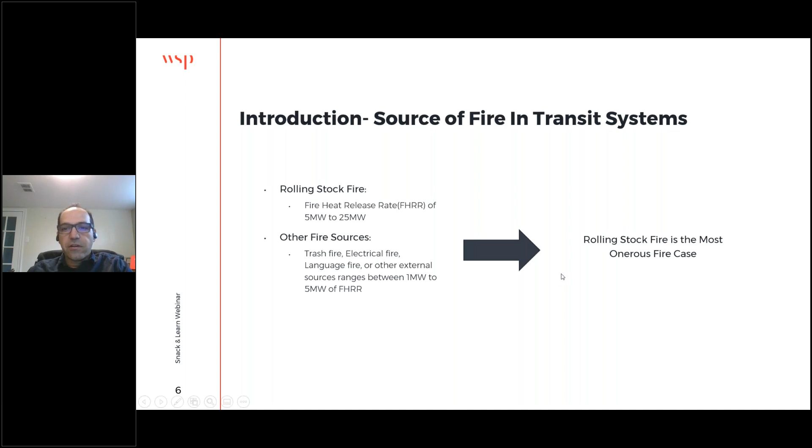So what are the sources of the fire in a transit system? There are a few major sources, but we can categorize them in 2 different categories. One is the rolling stock or the vehicle itself. Based on experience from different projects, if the rolling stock in a transit system goes through a full fire, the fire will be between 5 to 25 megawatts. Other sources of fire could be trash fire, electrical fire, luggage fire from what the passengers are bringing with themselves, or any other external sources. They normally range between 1 to 5 megawatts. So based on these numbers, you can see that the rolling stock is the major fire that can happen in an underground transit system.

So what are we doing in this presentation today? For the first part about the fire, we actually gathered existing information from two reliable sources, UK Railway Safety and Standards Board and Federal Transit Administration, FTA. They both publish the data. You will see the data that we collected are from 2007 and 2015.

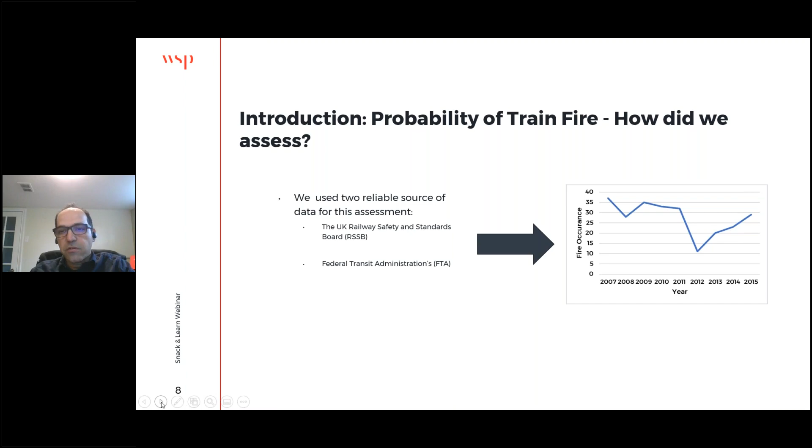The time that we were actually going through this analysis, I was preparing something to be presented for 2019 or 20. So the data is from that time. We had pandemics and everything. So because of that reason, the data is a little bit old. I looked at the newer data. I haven't updated it. It hasn't changed much, but definitely in the next version, I will provide updated data as well. But really the concept doesn't change. The concept still remains the same.

So to assess the risk, we are using CENELEC. There are different standards that you can use. There are even local standards. Some owners or companies have their own risk analysis, but we are using the concept of CENELEC. CENELEC basically tells us find the category and the frequency, and then we can find what are the risks of that incident. And this is exactly what we are going to do today.

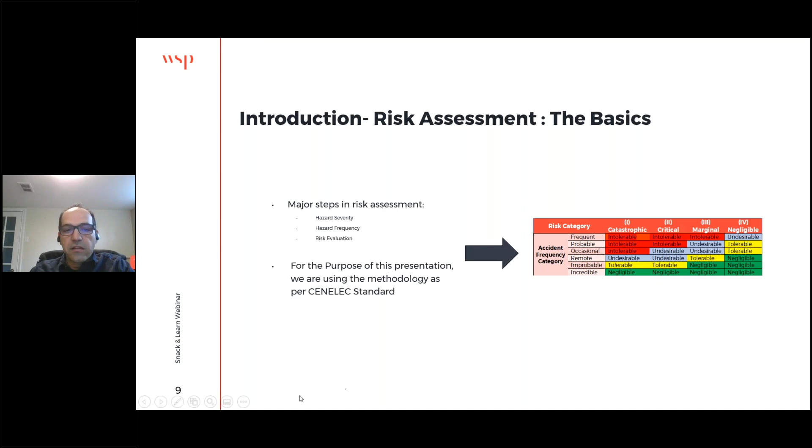So FTA data. We analyzed the data from 2007 and 2015. Based on the data from FTA, we actually went through all the data and we found the ones that caused a fatality. The final number is one major fire incident every 27.8 million miles traveled by the vehicle, or 44.7 million kilometers, if you're more familiar with kilometers instead of miles, like I am actually. I have a better sense of kilometers than miles. So is it good? Is it bad? Is it too much? We will see in a short period of time.

The second data that we use, RSSB, from British data. Again, major incidents with fires. Of course, there are incidents with fires and there are major incidents with fire, which is only 3.2% of all of those fires that are considered major. So based on that, and believe me, it was just by accident, I did not do anything with the numbers and data, but the number came back exactly the same as FTA data. It's still surprising to myself, but that's the reality. So the number came back 27.8 million miles traveled. You will expect one major fire incident every 44.7 million kilometers.

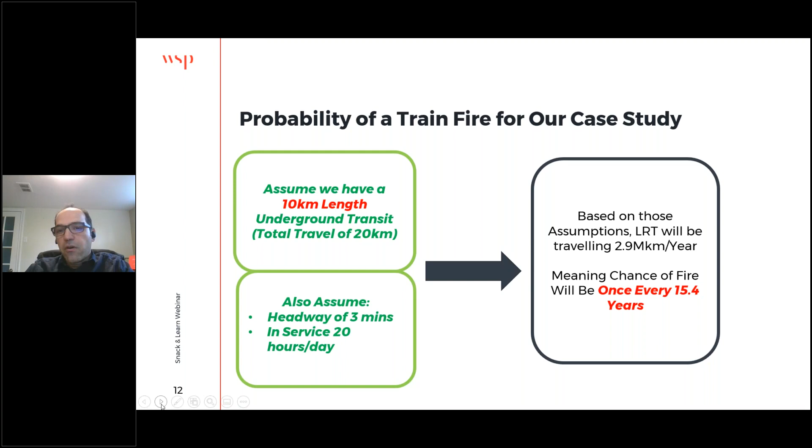It doesn't mean that it will happen. It's just a matter of it may happen. It's a very important thing actually to know that it doesn't mean that it is happening, but it may happen. So what do we do with that number? Is it a big number, is it bad? I guess to me, it makes sense because in my experience, at least 20 years being here, I heard of a few incidents. Some of them were major, meaning we had to evacuate the whole system. Some of them were not, but to me, the number kind of makes sense. It's in the ballpark of what I expected to see.

So for risk analysis, what do we do? We go to the CENELEC table. CENELEC actually is good because it very categorically tells you the frequency.

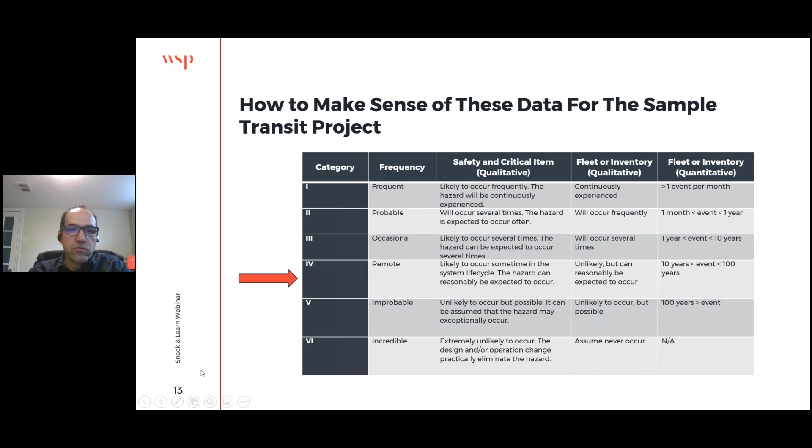If you're designing a 100 kilometer system underground, which I don't think that anybody does, then your category goes to occasional. So you have to go by project, but for most of the projects that I've worked on, we go back to remote.

As far as the hazard severity, a major fire incident could be considered catastrophic or critical. Either will work. It depends again on the situation, on your background data. You can actually talk with the operators, the fire department or authority having jurisdiction in that area to make sure that you categorize this properly, catastrophic or critical. I'm not really putting my foot on either of them. Each one could be correct depending on the project and the situation.

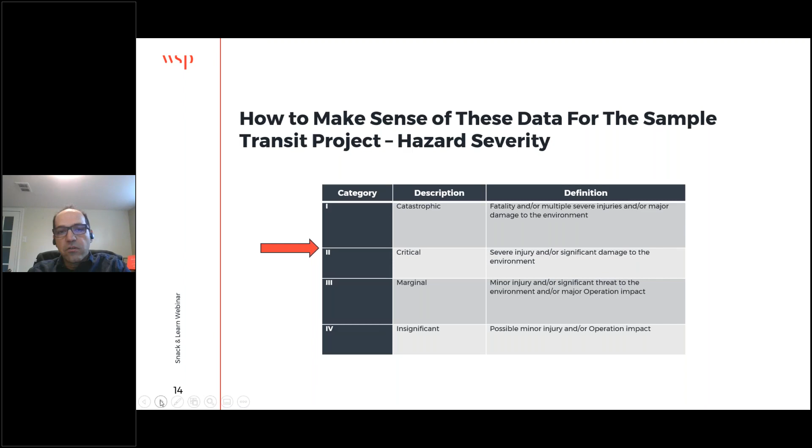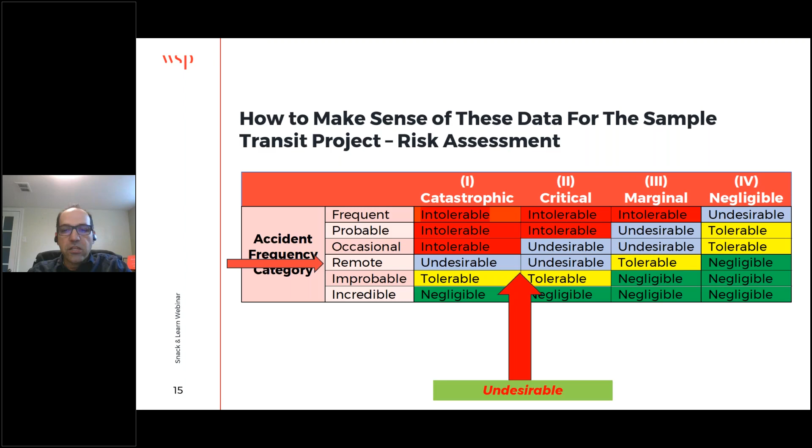The reason I'm not really insisting to choose one over the other is this. When you go to the risk analysis table with remote, critical or catastrophic, the risk comes back the same, undesirable. So when the event is a remote event, it doesn't really matter if it's critical or catastrophic. They are all the same category, undesirable. When a system comes back as undesirable, we have to make sure we mitigate the risk.

How do we mitigate the risk? In most cases, we go with codes. We go with NFPA 130, for instance, in North America. Building codes, there are European standards. Different regions have their own. Some of the owners and operators have their own codes and standards. We use that. In the next few slides, I want to show you a few features that, for instance, NFPA gives you to implement and how they work. Are they really changing the situation or not?

One of the biggest things that NFPA added in 2000 was fire hardening material of the vehicle. Pretty much what NFPA is telling us is that all the material used in a vehicle needs to be fire hardened. So there needs to be resistance to fire and fire propagation. It gives us a really good result at the end of the day.

The South Korean fire that I talked to you about and showed you some photos of at the beginning, they did a simulation of their existing car catching fire and a car that has been fire hardened based on NFPA 130. The results were pretty much the difference between day and night.

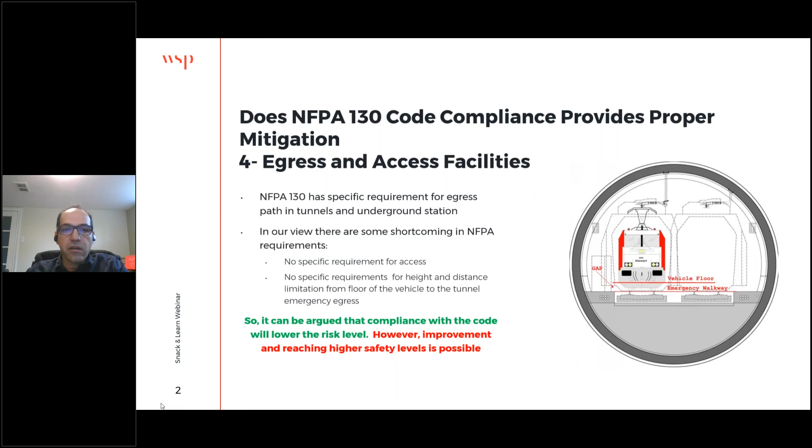There are other aspects of NFPA as well that we can talk about. Because of the time, I cannot really go through the details, but I encourage every one of you to actually read it with a critical eye. If the system is NFPA compliant, that doesn't mean that we cannot improve. There is always room for improvement. NFPA and codes are the minimum requirements.

Now let's see if we can actually do something about the pandemic. Why am I talking about this and why did I get into it? Funny thing, when the pandemic started, lots of colleagues, operators, owners, and friends came to me asking, can we use the emergency fans to do anything about the pandemic and about air circulation? So we were considering different options. But one of the first things we thought is that people are not in the tunnel. People are mainly in the rolling stock itself. So let's see if we can do anything about the rolling stock.

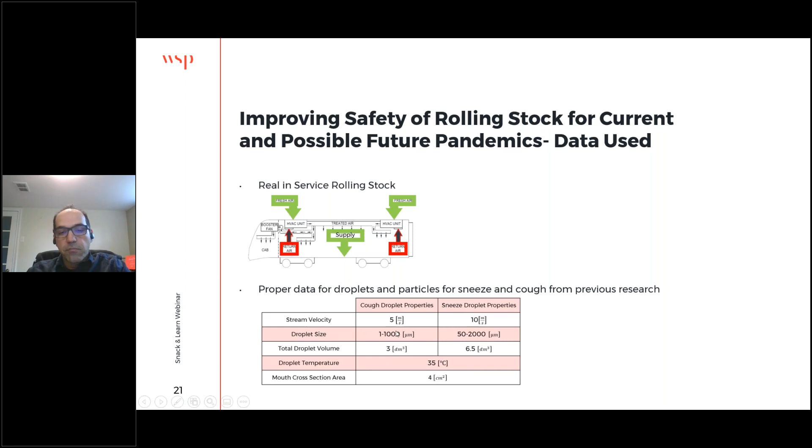We chose a real rolling stock in service. I'm not telling you which system, but the model we did is based on the numbers from an actual rolling stock. For the particles of coughing and sneezing, we chose the published data for particle size and velocity, and then we used CFD modeling. On the left side is the actual existing system, with a supply in the middle and two returns on the ends. We are assuming that we can change the system to something like the system on the right side, with the supply on the side and the return in the middle. And then we used CFD to model it.

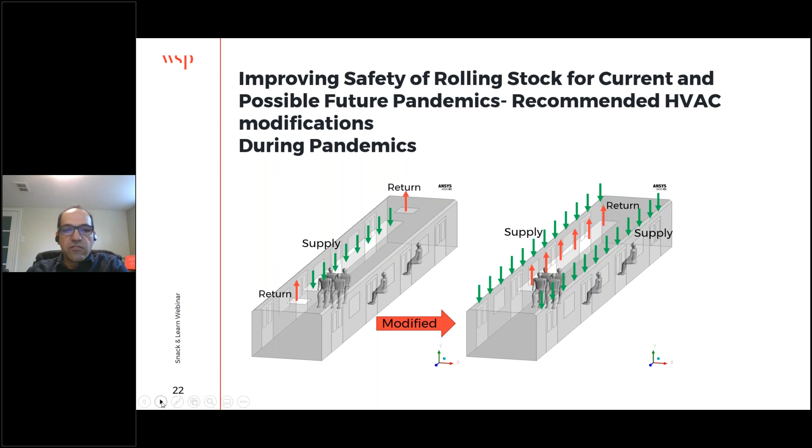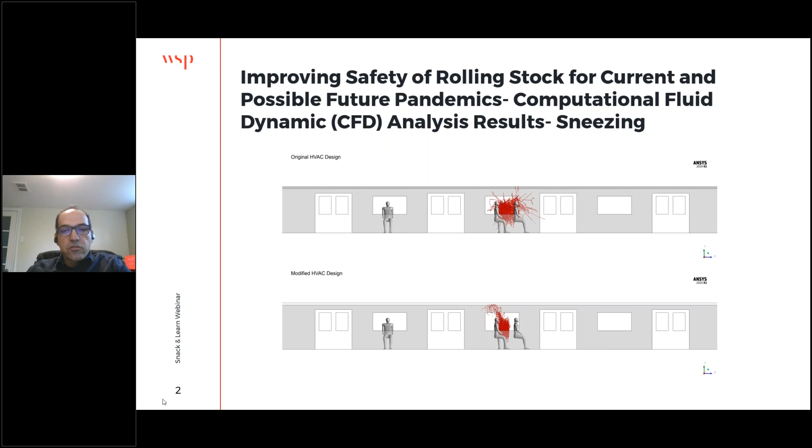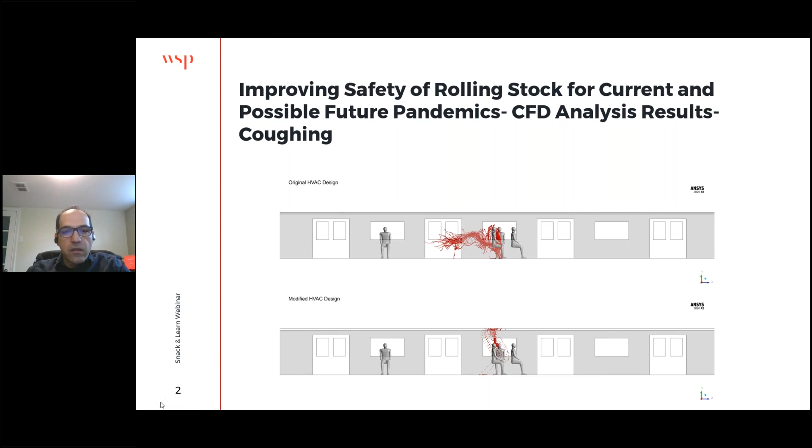Let's look at the coughing. Coughing is even worse. When you cough, you can see how particles are moving everywhere in the vehicle. And with the proposed system, you can see how effectively we can capture all the particles. It's not a bulletproof system. It does not address everything, but it shows that conceptually we can improve the system drastically if we make some changes. So it's really food for thought for owners, operators, and rolling stock manufacturers to look into. With that, I will go to the conclusion.

Based on the presentation today, fire in transit is a major risk and it's a real risk. Compliance with NFPA, building codes, and local codes is definitely a good mitigation, but it's not the end of the story. We can always improve based on our project needs and requirements. Also, to provide a safer and healthier transit system and make sure riders are confident and coming back to transit, we can definitely work on the HVAC system and improve the system design and how it provides fresh air, supply and return air. What we presented is not a bulletproof solution. It's just a proof of concept that things can be done differently.